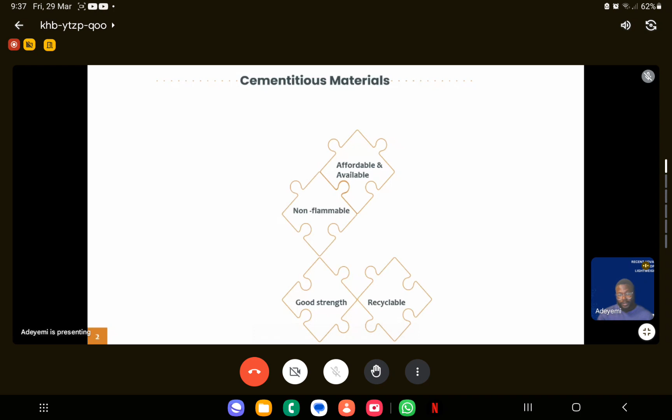Another reason is because we can recycle concrete now. Compared to things like plastic, it is non-flammable. Compared to wood, it is rot-proof, which means it doesn't rot. Compared to steel, it is rust-resistant. And also, concrete is very water-safe.

This is one of the reasons we could actually use concrete for various applications in water infrastructure, like dams and drainages. Concrete also has a good thermal mass, it's not flammable, it's insect proof, and does not release any volatile organic emissions, which is really great. This is really one of the reasons why we're using concrete on a large scale.

In addition to this, concrete also has a lot of properties, which result in us using a lot of this material. As we know, depending on how we design concrete, it could have very good durability. Also, due to the fresh nature of concrete, it's very versatile, which means we could have columns, slabs, various structures of various shapes. With all this performance, this has resulted in us really using a lot of this material, which makes concrete the most used construction material in the world.

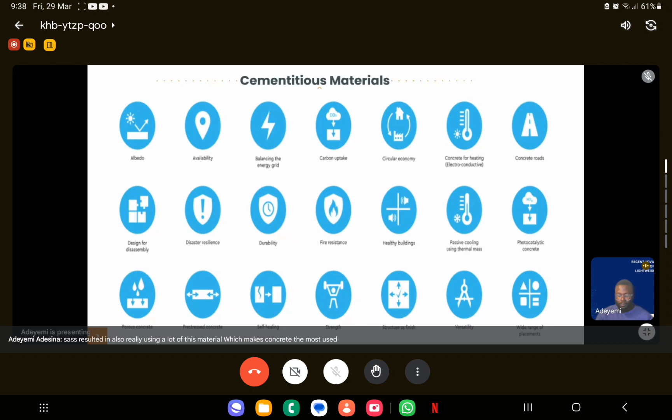And this is evident. I would say, literally everywhere we go, we are going to see these. There's concrete everywhere. We can't really do without concrete. Concrete is really evident everywhere.

Looking at the towers in Malaysia all the way to Canada, and we also have a new bridge currently in Canada we're constructing, which is going to connect Canada with the US. So concrete is a material that we can't really do without.

It's very essential, and these actually play a key role in sustainable development. There are actually few building materials that can really have significant impact on sustainable development. Concrete, on the other hand, has really huge impact on sustainable development.

For example, the way we produce the cement, the way we produce that concrete, the way we mine the resources could impact the environment. The emissions we put in the environment could impact the environment. And also, as we know, the cement industry, the concrete industry are actually one of the major contributors to the economy. So, on the positive side, this is very good.

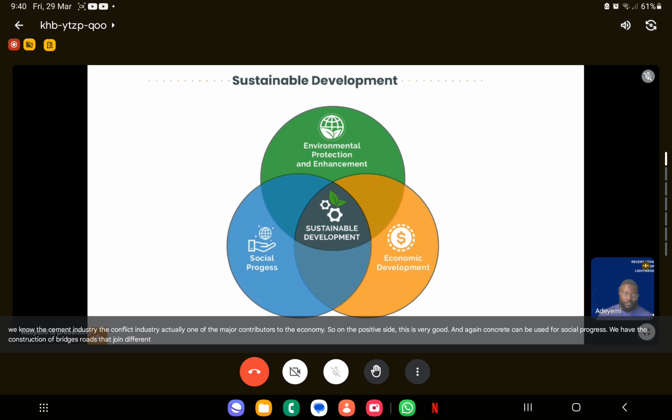Again, concrete can be used for social progress. We have the construction of bridges, roads that join different people together. So concrete as a whole is very critical to sustainable development. In fact, looking at all 17 sustainable development goals we have, concrete alone contributes to about 5 of those, which is really huge. So concrete is an essential material that we have to use.

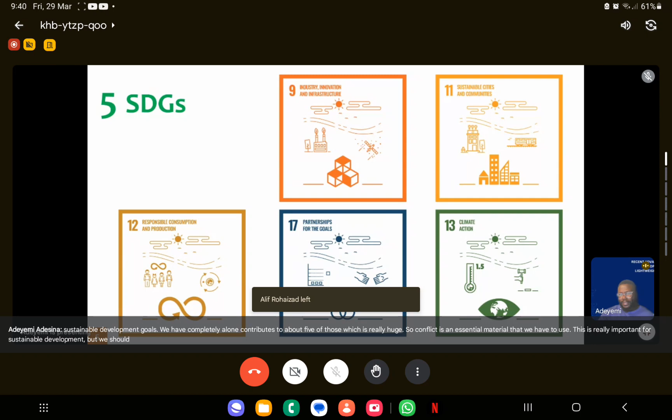This is really important for sustainable development, but we should also take note that we're using a lot of this material.

But the issue with concrete as a material is that we use too much, as I showed in the first slide. Because we use too much of this material, it means at the end of the day, we have more carbon emission from the production and use of this material.

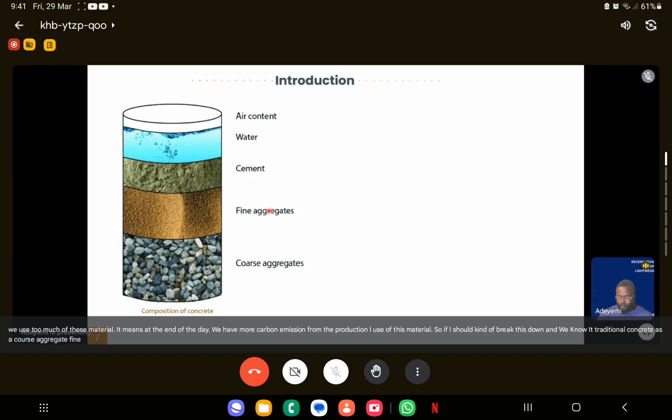So if I should break this down, we know a traditional concrete has coarse aggregate, fine aggregate, cement, water, and air. But out of all this, just the cement alone, which is about 11%, is responsible for the main carbon emission in the whole of our concrete.

That is a lot, which means the more we produce concrete, the more we use cement, the more emissions we put into the environment. And it has been proven that carbon emission is strongly related to climate change. So the cement industry itself, the way we use concrete, the way we use cement is contributing to carbon emission.

So again, if we look at the various industries we have, looking at the building industry, the transportation industry, the agricultural industry, just the cement alone is responsible for 7%. I think that is huge. We might think it's just 7%, but that's actually huge.

So imagine the number of industries we have, and just one industry is responsible for about 7% of the carbon emission. That is a lot, that is huge impact. Which, on a positive note, it also means if we can find a way to reduce carbon emission from cement use and concrete production, we can really have lower impact on climate change.

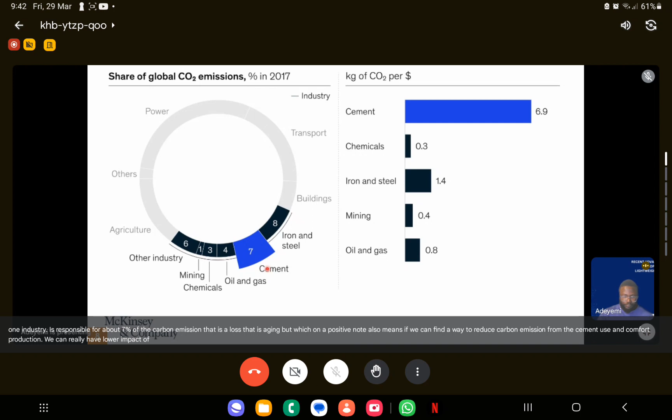As we all know, the main reason is the calcination process. During the calcination of the raw materials in the kiln, one of the products is carbon dioxide. There's a lot of research and development trying to use alternative fuels for cement production. Even if you reduce this emission to about 50 or 80 kilograms per ton, there's still a lot of it coming out. So one of the ways we can really reduce the environmental impact from the use and production of cement is to use less and find alternatives.

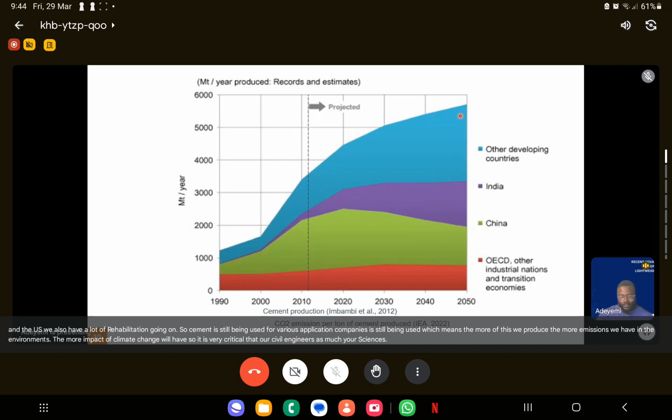This is a very popular figure I put here. We're not going to slow down on the use of cement. There's a lot of construction going on. Developing countries are constructing new materials. Developed countries such as Canada and the US also have a lot of rehabilitation going on. So cement is still being used for various applications, concrete is still being used, which means the more we produce, the more emissions we have in the environment, the more impact of climate change we will have. So it is very critical that as civil engineers, as material scientists, we play our part in improving the sustainability of the environment by looking for alternative materials.

If we look at the whole life cycle of concrete structures, everything I've talked about so far here is cement. But it's good to know that other processes in the production and use of cement could also contribute to carbon emission. In fact, one recent study we found is that the use of concrete itself could contribute about 10 to 25%. So it's critical to know that we should not just focus on cement production, we should also focus on other parts.

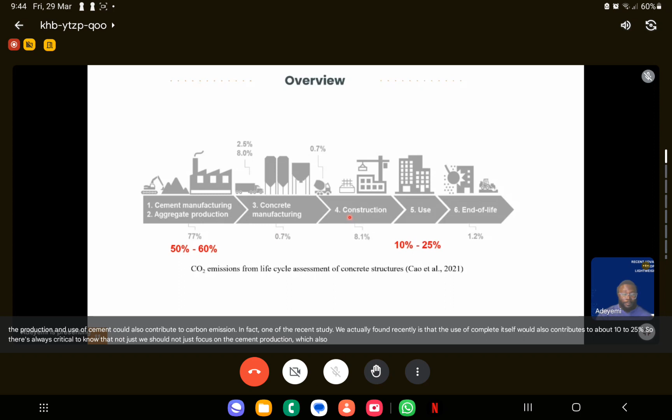But when we look again at the whole life cycle, the main emissions come from the raw materials and product stage. So to have a significant reduction of the environmental impact of the concrete industry, we really need to find an alternative to the conventional cement we use in concrete.

As a result of this, there's a lot of push globally now. We've heard low carbon concrete, green concrete. In fact, the United States has this infrastructure bill right now, investing a lot in low carbon concrete, green concrete. The main reason is that for us to reduce our carbon emission, the cement industry, the concrete industry is emitting a lot of CO2. We really need to find alternative materials to use.

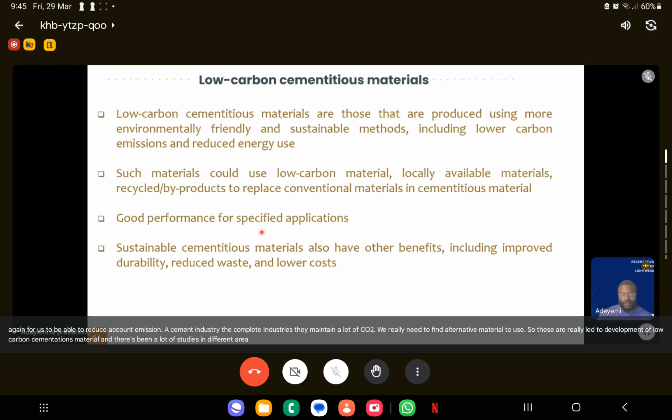This has led to the development of low carbon cementitious materials, and there's been a lot of studies in different areas on this, resulting in the use of various materials to replace cement, and various technologies. If I show the life cycle of concrete now, talking about the manufacturing stage, one of the ways is to use recycled aggregate or alternative binders such as geopolymers. Another thing getting common nowadays is to use 3D printing for construction.

An effective aspect for us to also reduce our emissions is effective design. Most of the time we use too much cement. For example, recently we're taking the core from a sidewalk and the compressive strength is 50 MPa. That is too much for a sidewalk, that is too much cement. So one of the ways for us to also reduce our emissions is to use less, and this can be achieved through effective mixture design.

And also we can use various additive manufacturing, effective repair methods, and so on. And I should say, to achieve low carbon, even though in this presentation today we'll talk a lot about geopolymer, using that is not the only solution. There is need for us to use a combination of materials, combination of processes to really achieve what we know as low carbon concrete.

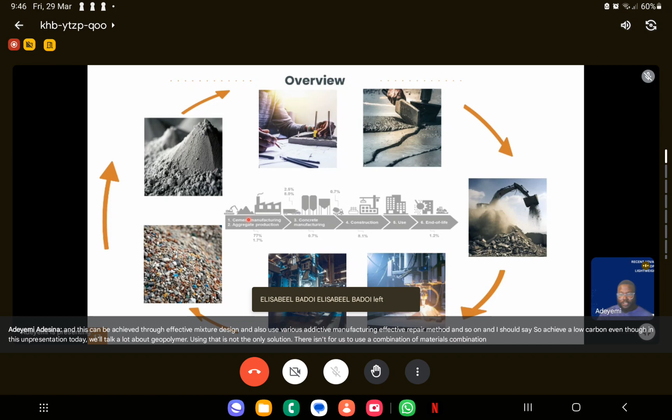So in summary, again, we really need low carbon alternatives because first, we need to supplement the materials. For example, all over the world now we have shortage of material because there's increase of urbanization. So looking for low carbon alternatives will offer us a solution to this. Also, a lot of low carbon concrete uses waste material, so this opens an avenue for us to manage this waste effectively. And most times too, these low carbon alternatives are cheaper because they're using waste products. So those are the main needs.

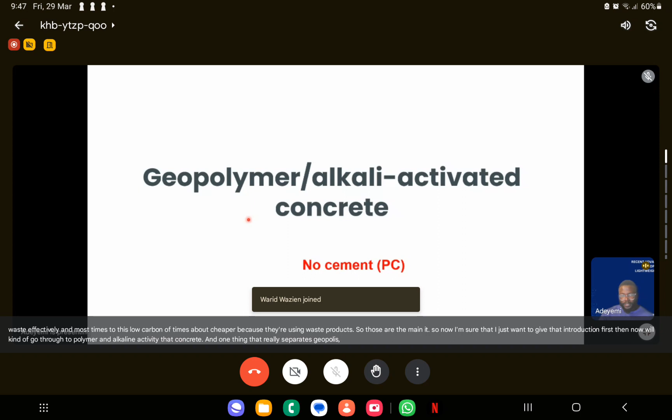So now through that, I just wanted to give that introduction first. Then now we'll go through geopolymer and alkali activated concrete. One thing that really separates geopolymers and alkali activated materials from the traditional Portland cement concrete is that there's no cement. As we know, for traditional concrete, it is made up of Portland cement, your aggregate, which can be fine aggregate and coarse aggregate, and also water. In some cases too, you can have things like reinforcement and admixture. That is conventional concrete.

The main difference between conventional concrete and geopolymers or alkali activated concrete is the binder. So we still use normal aggregates, we still use water, admixtures, reinforcement, those fibers. But the main difference is the geopolymer binder or alkali activated binder, which replaces Portland cement totally. I'd like to emphasize that this is quite different from the use of SCM. Most times when you use SCM, supplementary cementitious material, we use them in a way that partially replaces cement. Whereas with geopolymer or alkali activated binders, we totally replace cement. Most cases too, the same material we use as SCM, we use as precursor in geopolymer. But for geopolymer, the cement is totally replaced.

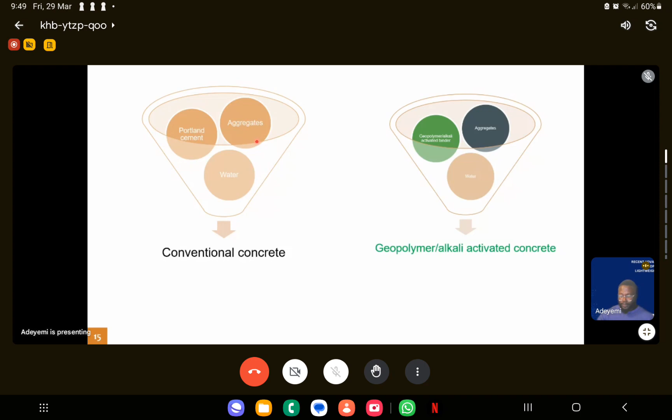And this just summarizes how geopolymer concrete is produced. As I mentioned earlier, we still use the same coarse aggregates, the same water, the same reinforcement if needed. But the main difference is in the binder composition. A geopolymer binder or alkali activated binder is composed of two main parts, which is what we call the precursor, which is the solid precursor, and the activators. The common activators we've used so far are sodium silicate and sodium hydroxide, and for the precursors, the common ones we actually use are fly ash and slag. The reason is that these are available in large quantities.

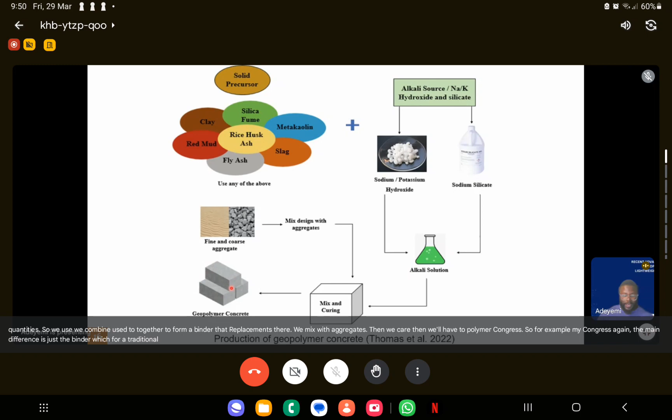So we combine these two together to form a binder that replaces cement. Then we mix with aggregates, then we cure, then we have geopolymer concrete. So for geopolymer concrete, again, the main difference is just the binder, which for traditional concrete is made up of just Portland cement. So if I should put a definition to geopolymer concrete, I will say this is a sustainable alternative, even though the term is relative, to Portland cement. So the only difference is that the binder is different.

And this binder is obtained by activating various precursors, which contain aluminate and silicate monomers, with alkali solutions to obtain a binder that acts like cement. There's really a lot of confusion in this field right now. Some people use alkali activated concrete, some people use geopolymers. Even though these two are kind of similar and both sustainable alternatives to Portland cement, in a way they are kind of different, and this is based on the chemical composition.

So again, I'm putting this very common figure, which I found really helpful, that separates different kinds of binders. You can see this is based on the amount of calcium you have and the amount of aluminate monomer you have. So basically for Portland cement, it is very high in calcium, which is responsible for a lot of the high strength we achieve, because when you have your hydration reaction, that forms your calcium silicate hydrate, your calcium hydroxide, the heat, and so on.

On the other hand, alkali activated materials have a lower amount of calcium compared to Portland cement, but there's a lot of aluminum content in there. So you can see, geopolymer itself is kind of a subset of alkali activated materials.

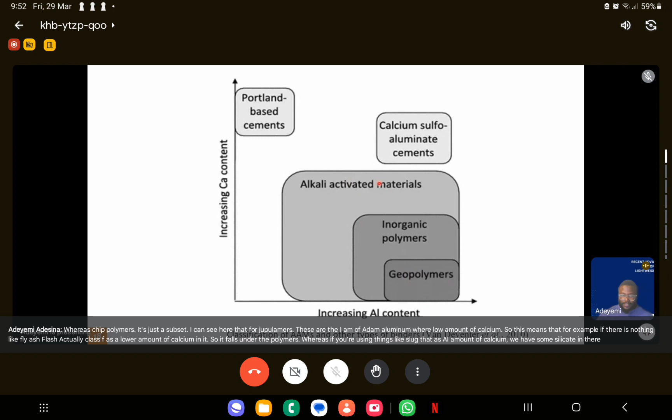Geopolymers have a higher amount of aluminum but a lower amount of calcium. This means that, for example, if you're using things like fly ash, especially class F, which has a lower amount of calcium, it falls under geopolymers. Whereas if you're using things like slag that have a high amount of calcium, with some silicate and some aluminate in there, that generally falls under the umbrella of alkali activated materials. So that's the main difference.

But for my presentation today, most of the things I'll be saying, I'll still be using these two terms interchangeably, because this figure I'm showing is just a general difference. The kind of activator you use, the curing method you use, could also determine whether it's a geopolymer, an inorganic polymer, or falls under another part of alkali activated materials.

I should say geopolymers are not new. One of the things with geopolymers is that compared to traditional Portland cement, we've not really used a lot of this material, but it's not something new.

In fact, recently we prepared a review that shows global application of geopolymers on a large scale. Even though we could not find a lot, we were still able to see examples from each of the continents. There's a lot of this in Australia, because Australia has really advanced in this area, and by the way, they have a lot of fly ash, which was beneficial.

So I should say again, geopolymer is not something new. It has been used for both non-structural and structural applications.

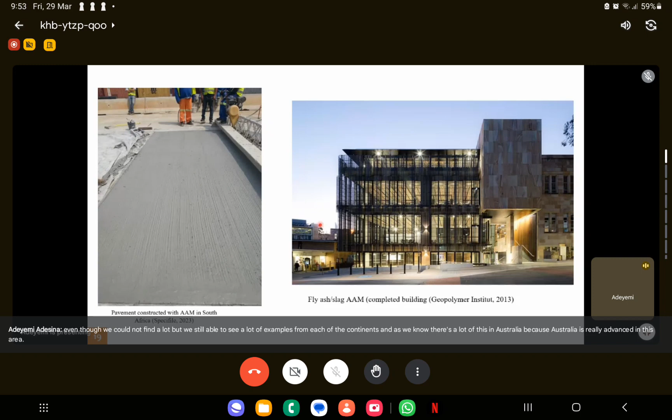For example, this is a part of a pavement that was constructed in South Africa using a geopolymer. And this is a popular building we know in Australia, which was completed with a geopolymer made with fly ash and slag as the precursor.

Also, recently in London, they were able to use geopolymer as a sustainable alternative to fill this hole. And in the US, they're actually using geopolymers for rehabilitating sewer tunnels, because the use of geopolymer in this application was found to be sustainable and also cheaper compared to traditional repair methods.

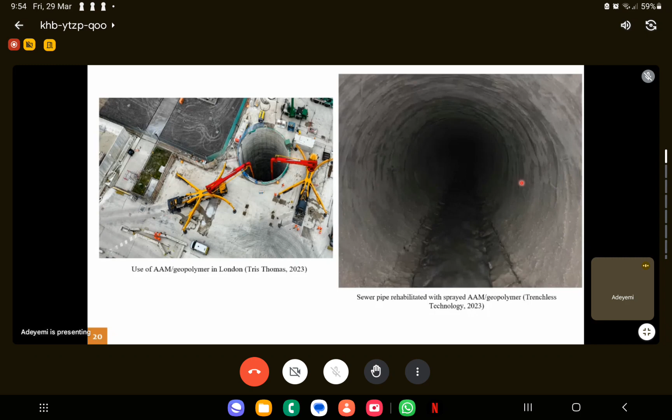So what is the issue with geopolymers? Why aren't we using a lot? Why has the progress really slowed down? Geopolymers and alkali activated materials have been around for a very long time. Even though it's getting more common in literature nowadays, this has been used for a very long time. For the purpose of this presentation, I'll pinpoint three main issues with geopolymers.

The first issue is the activator we use. The most common type of activators used in geopolymers is sodium silicate and sodium hydroxide. The reason we use this is because it has been proven over the years, and it also gives us very high performance compared to alternatives.

So that's one of the main issues with traditional activators. But the reason we still use this a lot is because it's well known to give us the performance we want, similar to or even better than Portland cement concrete. Another issue with this activator is that it's very expensive. Even though we might be using less compared to cement where we just add water, these activators are very expensive, which makes it impractical on a large scale.

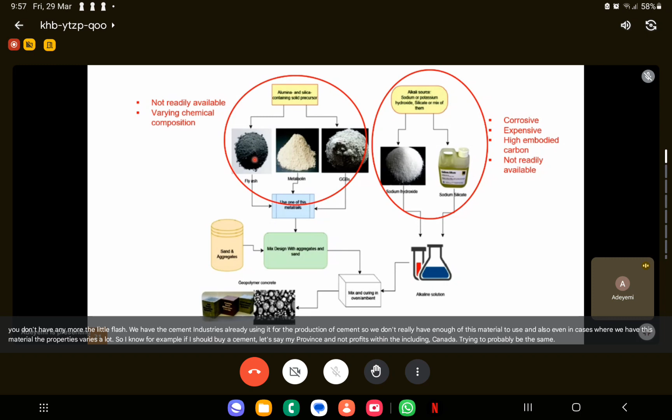Even in cases where we have this material, the properties vary a lot. For example, if I buy cement in my province versus another province in Canada, the strength will probably be the same. But if I get fly ash or slag from two different locations, the properties of the resulting concrete will be totally different. So this is one of the major issues with the precursor.

The last issue I'll mention for this presentation is the way we cure it. In some cases, heat curing is required. As a result of using heat curing for some of these geopolymers, it makes the whole production very expensive. And as we know, when we use heat, we're using more energy and we have more emissions. So that's a big issue with those curing methods.

Also, in some cases, it's just not practical. The use of heat curing is more practical in applications such as precast, if it's feasible in those cases. But compared to traditional concrete, we can't just use heat curing if, let's say, I'm making a rigid pavement, a road. I can't use heat curing. So that's a big issue with geopolymers.

For today, because of time, I'll talk briefly about the activators and also the precursors. One of the recent advances that has shown promise to really advance the use of geopolymers on a large scale is the use of what we call low carbon activators. Just from the name, it means compared to traditional activators such as sodium silicate and sodium hydroxide, these materials have a lower embodied carbon. That is, during production, it is less energy intensive compared to sodium silicate and sodium hydroxide.

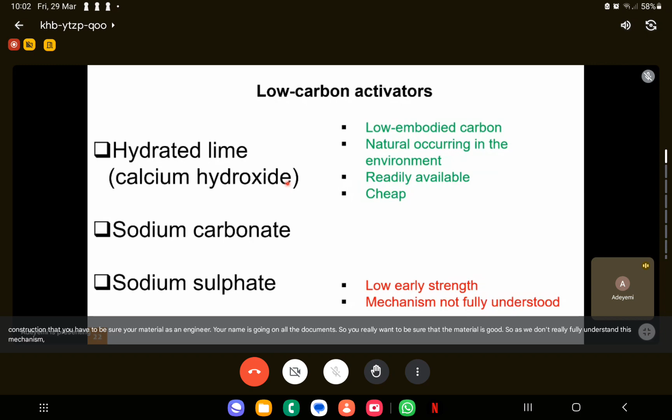Another issue is that we don't really understand the mechanism. Over the years, we've learned the chemical reaction between fly ash, slag, and sodium silicate and sodium hydroxide. But for sodium carbonate, sodium sulfate, and calcium hydroxide, we don't really understand it. And as we know, the construction industry is very conservative. For you to make any construction, you have to be sure of your material as an engineer, your name is going on all the documents, so you really want to be sure that the material is good. Since we don't fully understand this mechanism, this is one of the drawbacks of these low carbon activators.

But nevertheless, there are various ways for us to find alternatives to these traditional activators, and this could be from natural mine minerals or processed waste. Trona basically is a salt mine - we can mine sodium carbonate from trona, and sodium sulfate also exists naturally in the environment. Other types of waste could actually be processed, and there's a lot of advances in this area. Most of this waste, especially bottom ash, rice husk ash, glass waste, and silica fume, have been used as an alternative to sodium silicate in the production of geopolymers. Whereas industrial alkali waste, calcium carbide, and Bayer liquor were used as an alternative to sodium hydroxide.

So there's been a lot of progress in this area. I believe in the next 5 years we should see a lot of large scale developments. There's a lot of progress really happening in Europe right now, and I believe Canada is well positioned to actually be a leader in this area, to ensure more large scale applications are carried out, in addition to the laboratory verifications.

This is just an example of some of the results we got in the lab here at Windsor. Instead of using the traditional sodium silicate and sodium hydroxide, all we used was lime - this LM is lime. Lime is readily available, lime is cheap, and it's easier to use compared to sodium silicate. It's still a corrosive material - in fact, cement itself is a corrosive material - but compared to sodium silicate and sodium hydroxide, the concentration is lower.

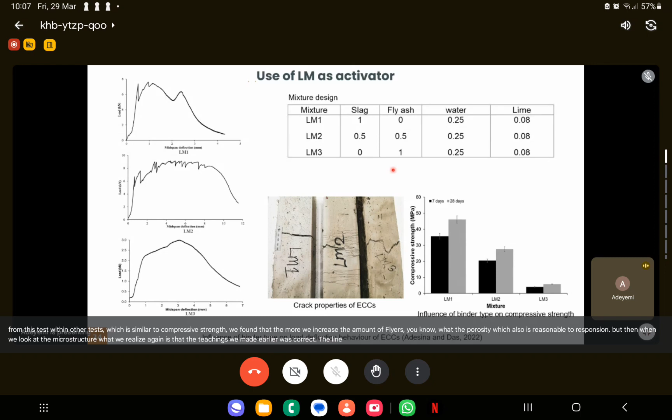When we look at the microstructure, what we realize again is that the hypothesis we made earlier was correct. The lime was only able to react with the slag, mostly because of the presence of calcium in the slag, whereas there's lack of real interaction, or lack of geopolymerization, with the fly ash particles.

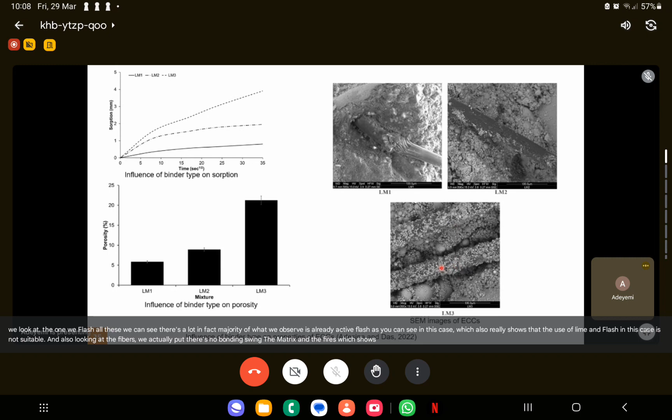In terms of precursors now—so I've finished about the activator. As I mentioned earlier, fly ash and slag are not available everywhere. In Canada we don't have fly ash, but in some other countries we have enough. In fact, I'm originally from Nigeria, and right now we're building more coal plants there, which means we have more fly ash, so it's more ideal for us to use fly ash as a precursor to produce geopolymer. It's very critical that when we produce geopolymer, we really identify what locally available materials exist.

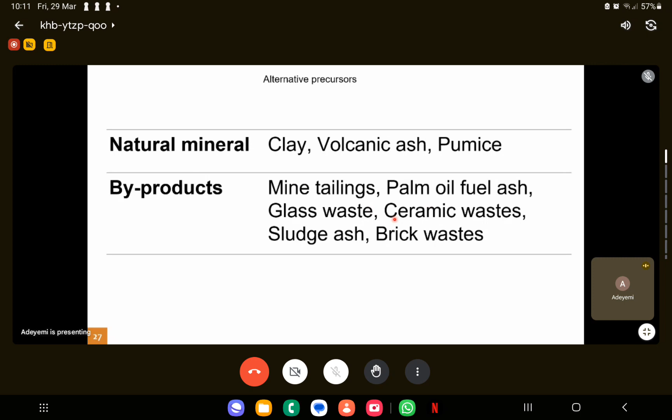In terms of byproducts, one of my current research in Canada is exploring the use of mine tailings, because Canada mines a lot of critical minerals and we have a lot of these tailings just sitting out there, posing a threat to the environment. So what if we could use this material as precursors to produce geopolymers? In addition, depending on location, there are things like palm oil fuel ash, glass waste, ceramic waste, and brick waste. Ideally, once a waste product has a high amount of silicate, aluminate, and even calcium, it would be perfect—all these could be used. This has really shown the advances in precursors over the years.

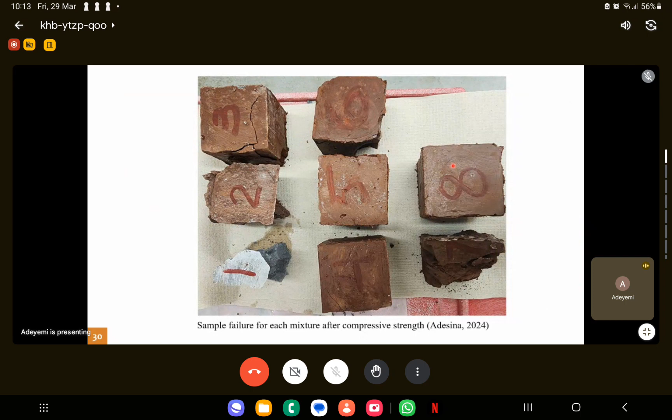When we use these alternative precursors, there might be a need to also use some traditional material to replace them—so if I'm using mine tailing, I might have to mix maybe 5% to 10% slag to achieve the desired strength. This shows a picture of the testing. Because of the color, we do a lot of leaching tests, since these mine tailings have heavy metals. So right now we're testing to ensure these heavy metals don't leach into the environment, and hopefully we'll figure that out soon.

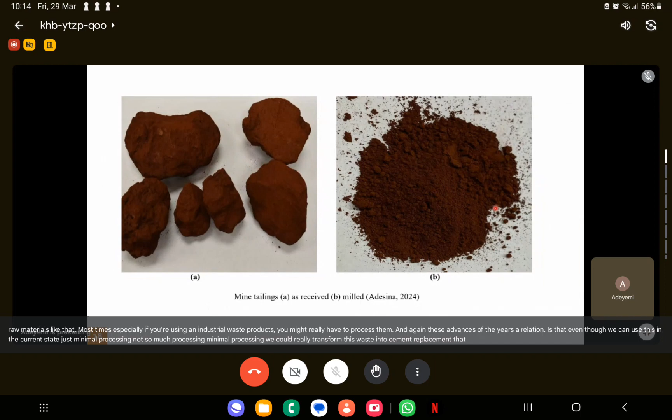As I mentioned, ideally we can't really use these raw materials as they are. Most times, especially with industrial waste products, you might have to process them. Advances over the years have shown that even though we can't use this in its current state, with minimal processing we could transform this waste into a cement replacement.

One of the ways to do this is through what we call alkali activation. I should mention, this is different from the geopolymer binder itself, so this happens before you mix your concrete. When you obtain your raw material, you add a little bit of alkali, mix it together, then dry it. That's called the alkali activation of mine tailings.

There are various ways to achieve this. It could be through mechanical activation, which is just grinding your waste products to reduce particle size, increase surface area, and make them more reactive. Or it could be through chemical reaction, using various chemicals to achieve new phases.

One tool that has been really helpful nowadays is thermal activation, similar to the calcination of clay. Basically, these mine tailings are subjected to about 100 degrees Celsius, and we find them to be more reactive in this case.

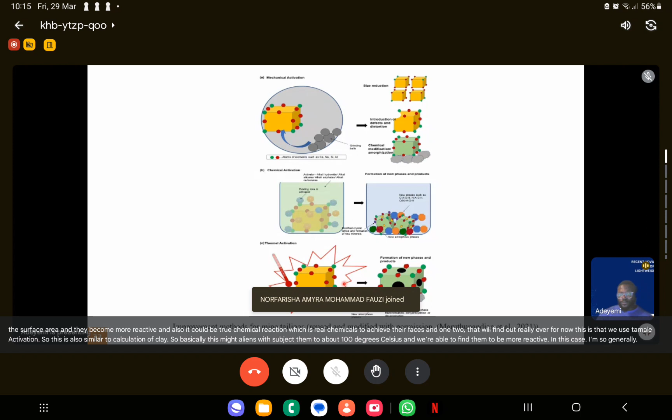Generally, any solid waste product available in large quantities could be explored. But the main thing is to check first their chemical composition, whether they have a sufficient amount of silicates, aluminates, and some calcium, which will be great.

So this treatment could be done with minimal energy—it's not energy intensive. And at the end of the day, because we're replacing cement totally, this is still very sustainable.

With all these advances so far in terms of the use of alternative precursors and alternative activators, there's still a lot of challenges. In fact, that's one of the reasons why we're not really using this on a large scale. But this area is very promising, and we expect a lot of advancement to occur in the next 5 to 10 years.

One of the main issues is that there's a lack of standards or guidelines for mixture design or even structural design. We've used traditional concrete over a long period of time—there's a lot of standards: ASTM, Malaysian standard, ACI standard, CSA standard. But no standard really exists for geopolymers. So even if you have a good geopolymer performing very well, an engineer can't use it because there's no guideline supporting its application, either for mixture design or structural application. This is one reason why our standards need to move more towards performance-based standards rather than prescriptive-based standards.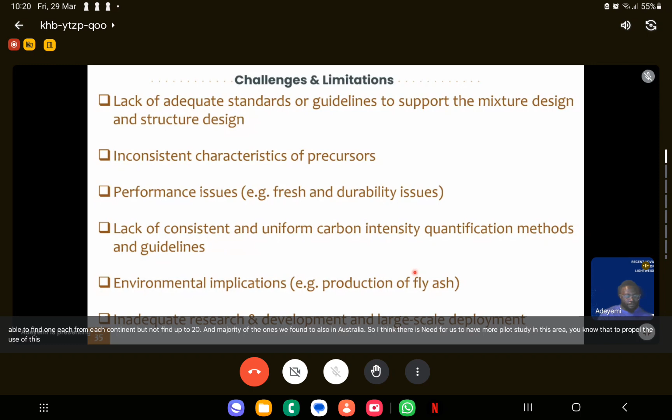But again, this field is very promising, and future research in this area should focus more on optimization of the mixtures in order to have more consistent properties.

Also, a key part of this would be to use materials available locally. Because fly ash is available in a particular part of a country does not mean we should use that same material everywhere. So let's say, for example, if I'm making geopolymer for a large-scale application in Malaysia, one of the key things I'll do first is see what material is available on a large scale that we can use. Then I can engineer that material, activate it, and use it to produce geopolymer. Because when you do that, you're managing waste and also reducing embodied carbon, since you don't have to transport raw materials.

Also, there's need for more research in the future to focus on durability and long-term performance. A lot of the current studies and applications only test mechanical properties. But as we know, mechanical properties are not sufficient for concrete materials. We need to see the durability in various environments. Can I use this material in a cold area? Can I use it when the weather is hot? Can I use it for the construction of a bridge? So we really have to explore this.

Also, I should say geopolymers should not really be seen as a total replacement of cement or traditional concrete. We're better off starting by using geopolymers for specialized applications. So if you want to make sidewalks, yes, use geopolymers. If you want to make lightweight concrete, use geopolymers. We should not see geopolymers as the all-around solution for traditional concrete at this stage, even if in fact it could eventually be. So one way we could advance the application of geopolymers is to create them for specialized applications, which will also improve their acceptance in the industry.

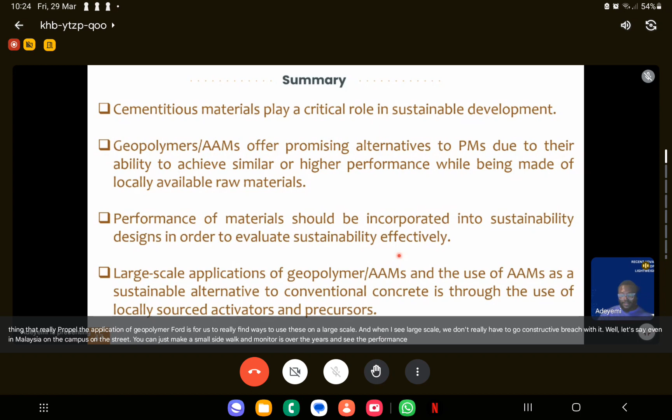A huge factor that will really propel the application of geopolymer forward is for us to find ways to use these on a large scale. And when I say large scale, we don't have to go construct a bridge with it. Even in Malaysia, on a campus, on a street, we can just make a small sidewalk and monitor this over the years to see the performance. These will be examples to show engineers that this material can perform very well.

And this will be the end of my short presentation today. I tried to make it brief. If you have any questions pertaining to geopolymers or alkali materials, I'll be happy to answer. Thank you so much, everybody, for attending this session and for listening.

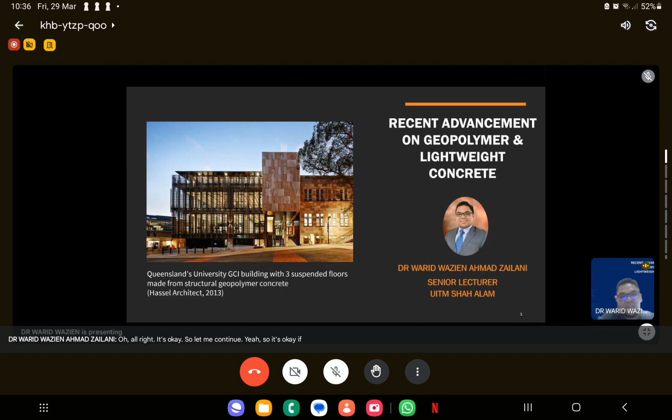I think we all know that to start for my sharing section, I would like to start with this video. This video does not relate to geopolymer or lightweight concrete, but it is like some reminder or lesson that we can learn together, especially for the students.

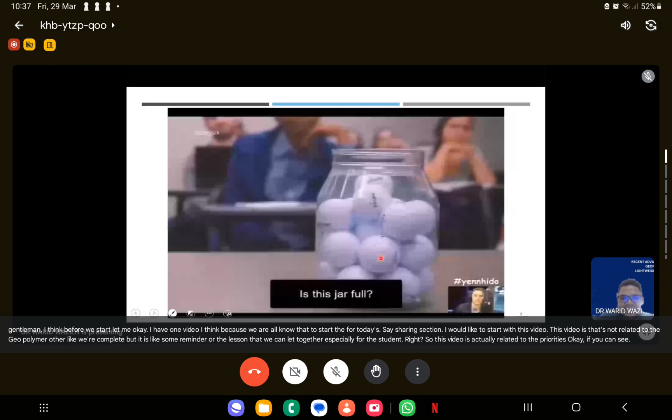So this video is actually related to priorities. If you can see, there is a container or a jug that has been filled with various items. The professor put golf balls, and then the pebbles, and then the sand, and started filling the jug with all these materials.

So what I would like to share here is about priorities, because nowadays I see that most of our students and most of us are not aware, or do not really know, the importance of priorities.

Can you imagine if you start filling that jug or container with the sand? The golf balls, you will soon find there is no room left for the larger items, right? But when you put the golf balls first, and then after that the sand, the container has been filled up with all this material.

So meaning that when you properly plan your tasks and everything, you know how to begin your day with the important things, then you can manage and achieve many things in a day. So this is just like a metaphor which illustrates the importance of prioritizing our tasks and commitments.

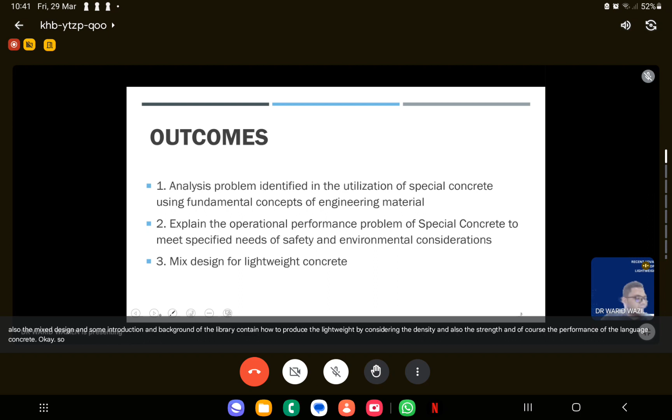And lastly, I will share also the mix design and some introduction and background of the lightweight concrete, and how to produce the lightweight concrete by considering the density, the strength, and of course the performance of the lightweight concrete.

Okay, so this is the issue, this is the global issue. What is really happening in the world today, especially in the cement industry, as aforementioned also by Prof. Adeyemi, in Canada, in US, and I think also in Malaysia, we have the same problem, which is about carbon emission to the environment.

Because one of the pollutions created by the cement industry is smoke. This smoke contains carbon dioxide, because the production of cement requires a burning process. And of course, if you can see, all the construction structures or construction materials available that have been practiced nowadays are made of concrete.

Most of our infrastructure, bridges, buildings, houses, and work buildings use cement. The cement sector is the third largest industrial source of pollution, emitting more than 500,000 tons per year of sulfur dioxide, nitrogen oxide, and carbon monoxide.

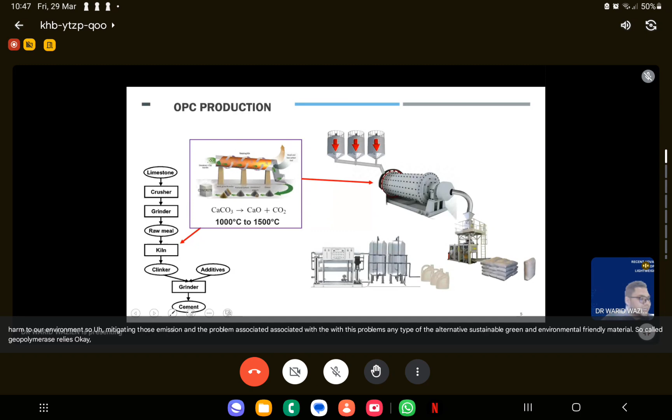To mitigate these emissions and the problems associated with them, a new type of alternative, sustainable, green, and environmentally friendly material, so-called geopolymer, was realized. Let me give some introduction.

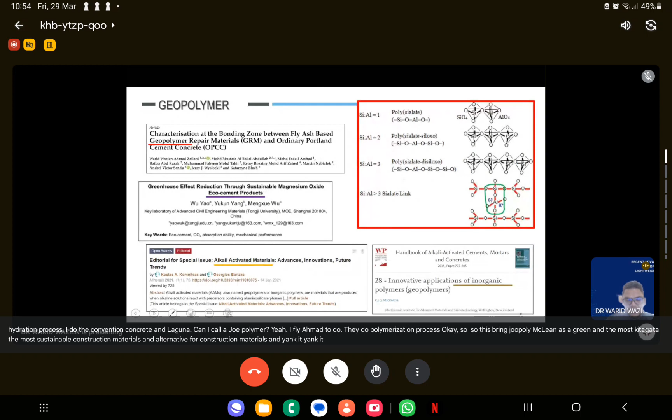Alright, so this has been explained by Prof. Adeyemi. So here, Portland cement base is high in calcium, which is commonly used in conventional concrete. The calcium comes from limestone that we burn, which releases CO2, because we need calcium to get C3S, C2S, C4AF and C3A in the cement composition, in OPC cement's composition.

But in geopolymer, we does not required calcium. As long as we have silica and alumina in our precursor, in our aluminum silicate source material, we can activate this silica and alumina to become the geopolymer.

But there is also source material or waste material that is high in calcium, like Prof. Adeyemi explained earlier regarding lime and also slag. Slag contains very high calcium, like cement. So we categorize this as what we call alkali activated materials.

So in summary, both geopolymer and alkali activated materials are eco-friendly and are an alternative to Portland cement, involving the use of an alkali activator to initiate the chemical reaction. Different precursor materials will have different mechanisms, different chemical reactions, especially for the high calcium and low calcium geopolymer system, and will also result in a different microstructure of the geopolymer itself.

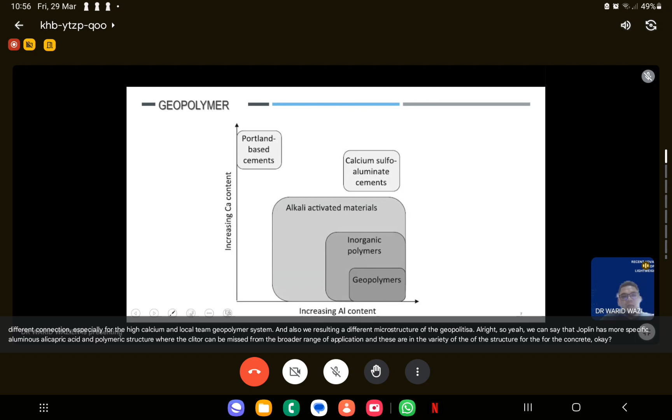So this is the difference between the OPC and also the geopolymer. As we can see, conventional concrete uses cement, and if you look at the market now, we already have blended cement or what we call composite cement. That is a mixture between ordinary Portland cement and fly ash, or some pozzolanic material. But in geopolymer we didn't use cement at all.

We only depend on fly ash or metakaolin or slag as our precursor. Sometimes we use one precursor, sometimes we use more than one precursor. We call it binary geopolymer or tertiary geopolymer. Binary meaning we combine two precursors, for example fly ash and slag. Tertiary, we combine three precursors, like fly ash, slag, and kaolin.

So different application, different formulation, and different mix design. Okay, so this is some background or knowledge related to the OPC.

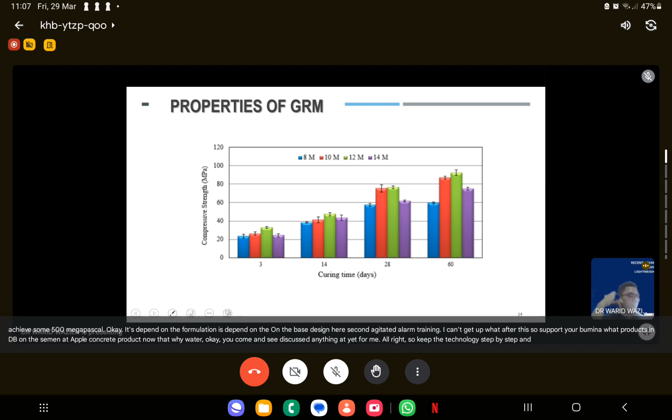Alright, let's look at the step by step we need to do. So right now we have formulation for the geopolymer repair materials, and we have formulation for the soil stabilization.

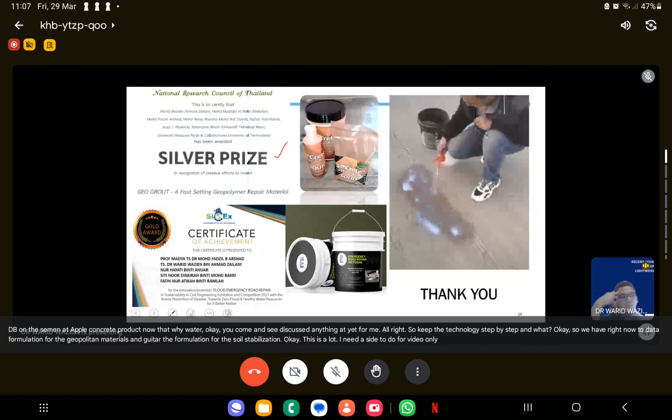If you look, I found this video, very simple. You see them repair potholes on the road, just like that. So I assume this is the product they use, which is the geopolymer. They put, if you see what they put, our alkali activator, and then we put our fly ash mixed with sand, and then we spray our alkali activator again, and it completely hardened.

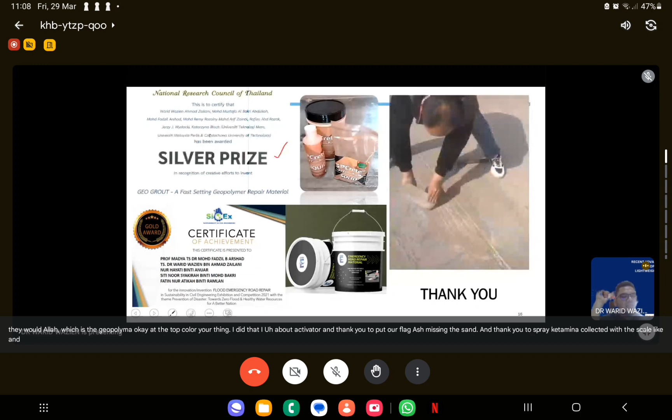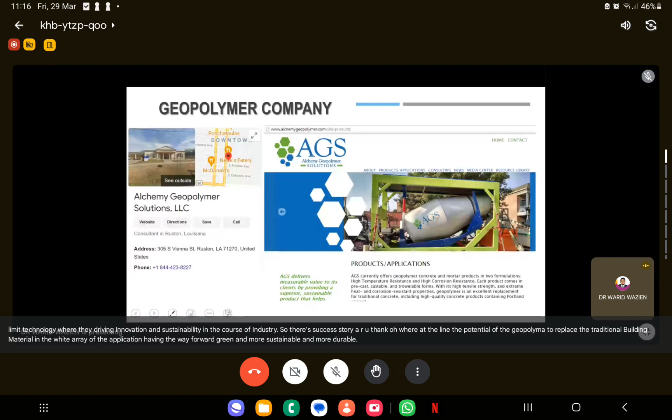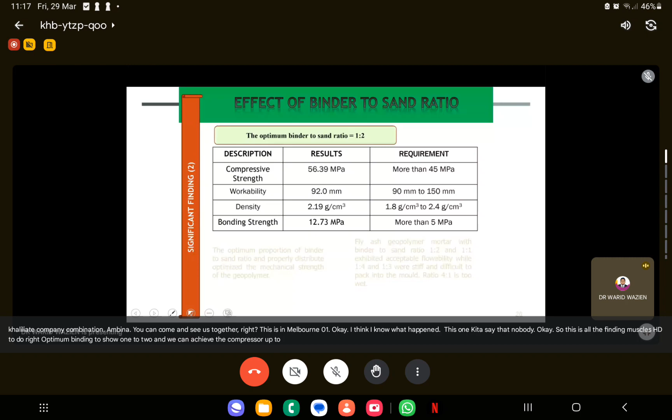Okay, so this is all the findings from my PhD before. Optimum binder to sand ratio 1:2, and we can achieve compressive strength up to 56 megapascal within 1 day, because I did this for road repair. When repairing potholes on rigid pavement where the substrate is concrete, we need a very fast setting and high early strength concrete.

So right now we depend a lot on Sika and similar products. So by introducing this geopolymer concrete, we have successfully installed and applied our product.

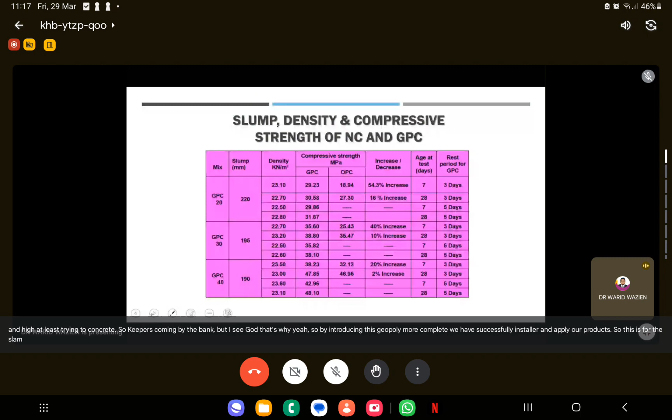I think this one we will cover in our practical training. We will do cost comparison and so on.

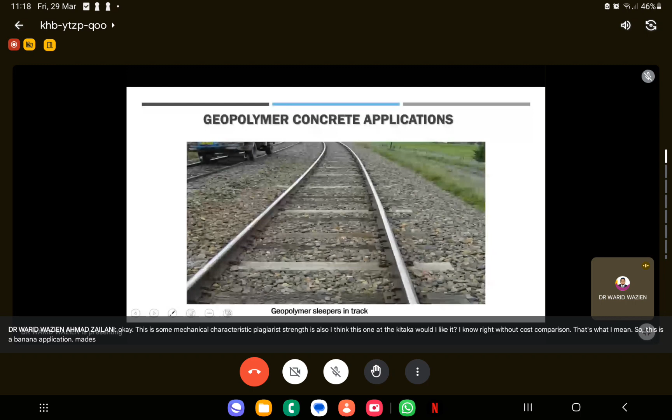So this has many applications - roadways. This is a sleeper, used as a railway sleeper. Okay, geopolymer pipe, fire resistant geopolymer and etc.

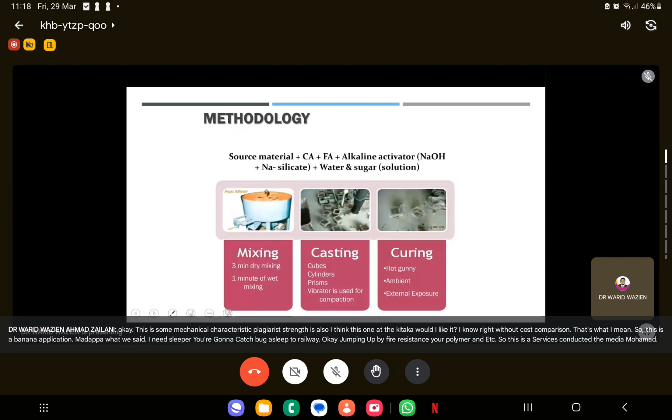So this is some research conducted, and here they use fly ash, MIRHA and silica fume. And they use sodium silicate and sodium hydroxide. So they try to see the effect of the curing method on the properties of the geopolymer concrete. Okay, SEM analysis - this is the zoomed in image, we use scanning electron microscope.

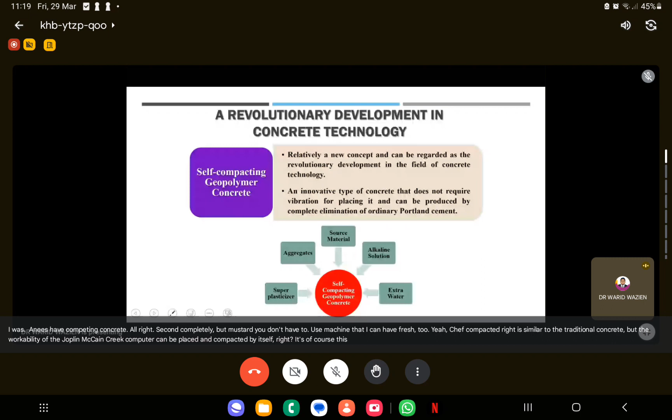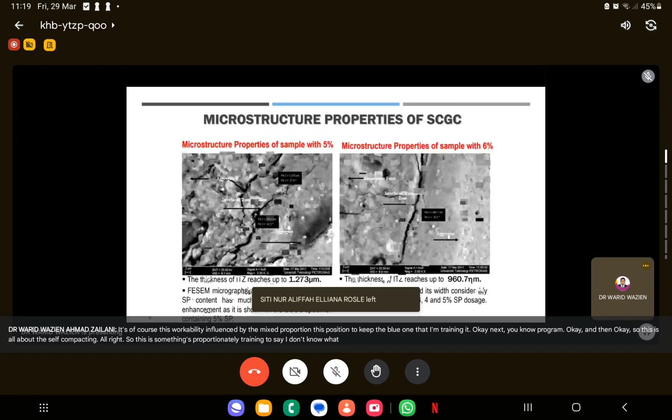Of course, this workability is influenced by the mixed proportion. We need to do the mixed proportion later in our training for our next program, okay? So this is all about the self-compacting concrete. This is some mixed proportion, and in the training I will teach how to do all this mixed proportion. This is just going through the properties of the self-compacting geopolymer concrete.

The bonding characteristic, okay. Here we use geopolymer for soil stabilization. We see that we need an advanced method to improve the physical and mechanical properties of the soil. This technique involves injecting or grouting the geopolymer. In a fluid state, it will flow into the spaces within the soil and into the ground.

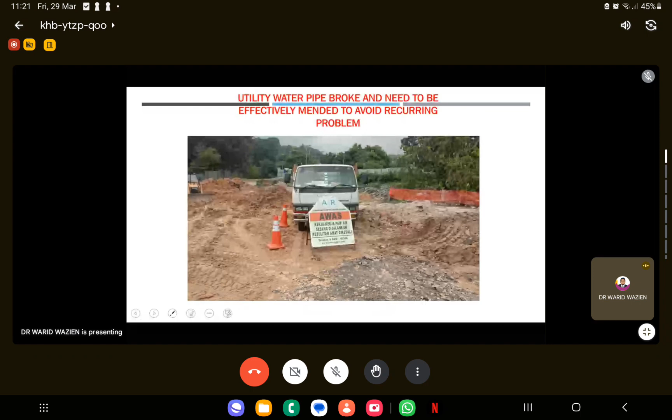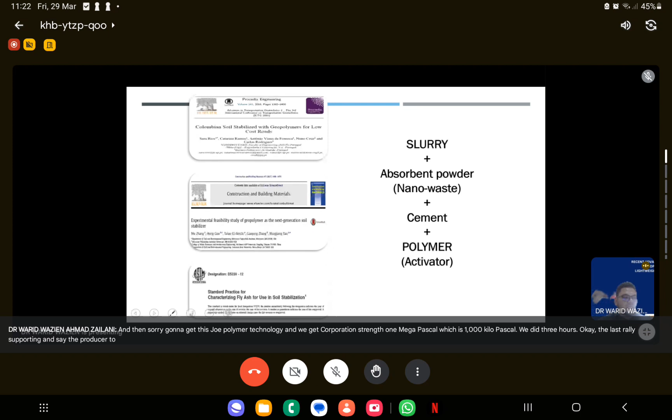So we turn this slurry into strong soil. This soil I took from the site, soaked it in water overnight, and then used this geopolymer technology, and we got compressive strength of 1 megapascal, which is 1000 kilopascal, within 3 hours. So the slurry mixed with a nano powder I produced, and then mix with cement and the polymer.

So this is using nano powder technology. This nano powder I made from geopolymer as well. So we have an absorber, we mix it with the slurry, and then we add a certain proportion of cement and activator, then it completely hardens and gains very high early strength.

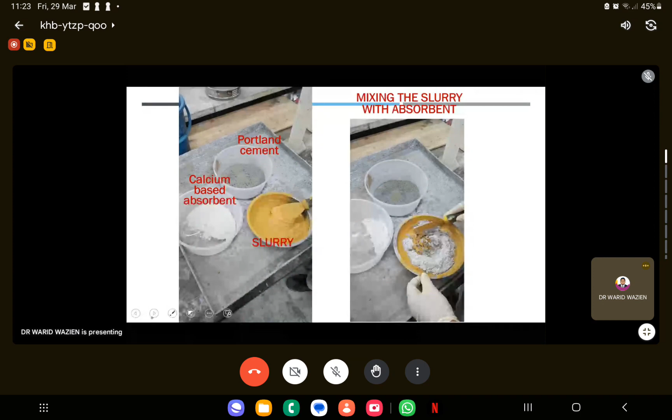Then I made a few specimens by varying the mix proportion, and we tested the strength. We checked the compressive strength values, and after we did the test, I soaked it in water again. The hardened soil was soaked again to check if it's still intact after soaking. We saw it's still intact, meaning the reaction fully involves the grain of the soil in the geopolymerization process. So within our setting time test, we got 1 megapascal or 1000 kilopascal.

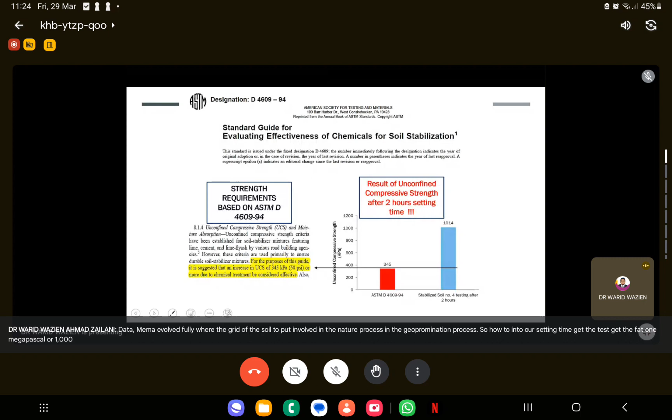According to standard ASTM D4609, for soil strengthening or soil stabilization, we need to gain at least 345 kilopascal. But when we use our geopolymer absorbent, within 2 hours we already got 1000 kilopascal. Meaning very fast setting, high early strength.

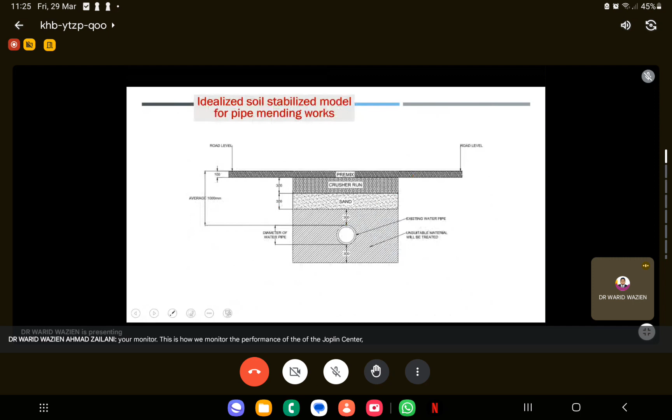Okay, we made a sequence of soil stabilization work. After the responsible party repairs the utilities, we start treating the unsuitable soil inside the trench and soil compaction, then layer sand on top, crusher run, and pavement. So this is the method statement, and this is the mechanism or schematic diagram.

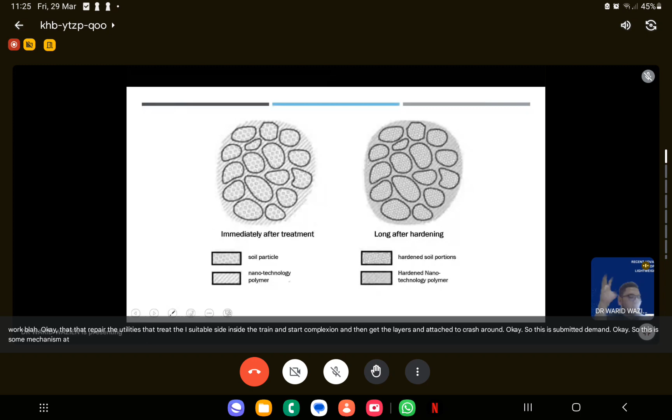Okay, so that's all for the geopolymer. Okay, now I'll move on a bit to the lightweight concrete.

Okay lagi ke? Boleh continue ke? Boleh doktor. Hari ni dengar saya belek apa tak tahu kan? It's okay, kita pun ada buat recording. So siapa yang nak tu, tapi ada sedikit kata management cost untuk recording video tu nanti.

Dan untuk geopolymer tu nanti kita akan buat training. Saya akan ajar mix design untuk you buat. Lagi cantik kalau industri tu sendiri dia ada waste dekat site, construction demolition waste ke, slag waste ke, ataupun yang baru ni dia orang jumpa saya. Bila saya buat chemical composition, saya check, content dia very high silica and alumina. So now kita tengah buat formulation untuk dia. Ini mana-mana industri yang berminat can come and contact us. We will discuss and try to do the preliminary study, right?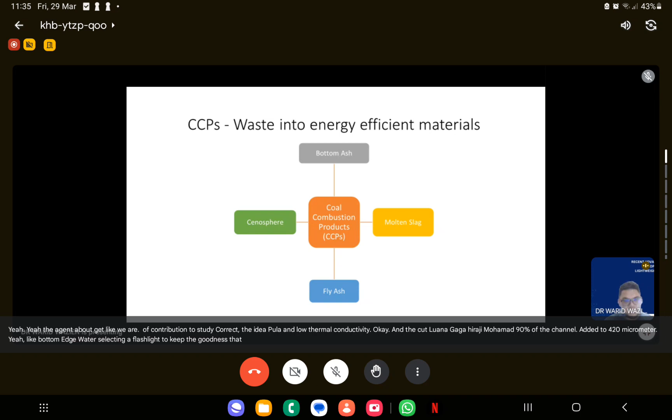Overseas, Hirajima from Japan found that 90% of the cenosphere has a diameter in between 100 to 420 micrometers. The rest, bottom ash, molten slag and fly ash, we use in regular geopolymer. For lightweight geopolymer, we need to incorporate cenosphere. This is fly ash from Kapar, Jimah and Manjung.

So this is cenosphere. We've checked its spherical shape, its density, resistance against oxidative and corrosive environment, thermal conductivity, and also its mechanical strength.

Lightweight using cenosphere - actually this cenosphere is new. In Malaysia, they just throw it away, nobody uses it yet. It's very lightweight, the density is about 500 kg per cubic meter. Can you imagine? Very lightweight.

And it is in hollow sphere form, which is composed largely of silica and alumina on its surface, on the outer surface of the cenosphere. And then we checked its density is very low, with high thermal insulation and high strength-to-weight ratio.

So when we incorporate cenosphere into the geopolymer matrix, the result is very surprising because we get concrete that is light and also high strength. So it's very good when we can reduce the overall density of the concrete by using this waste.